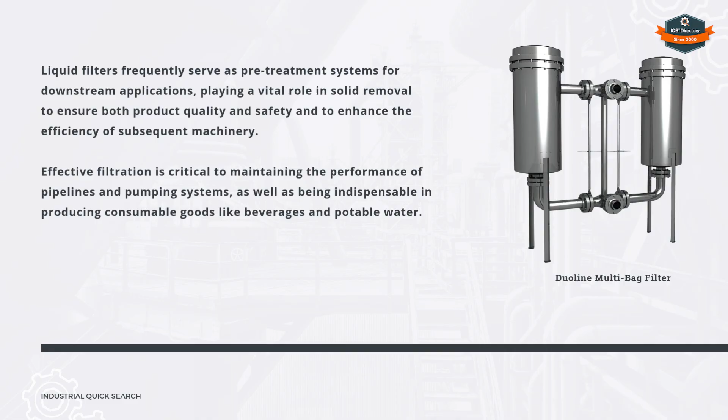Chapter 2. What are the operating principles of liquid filters?

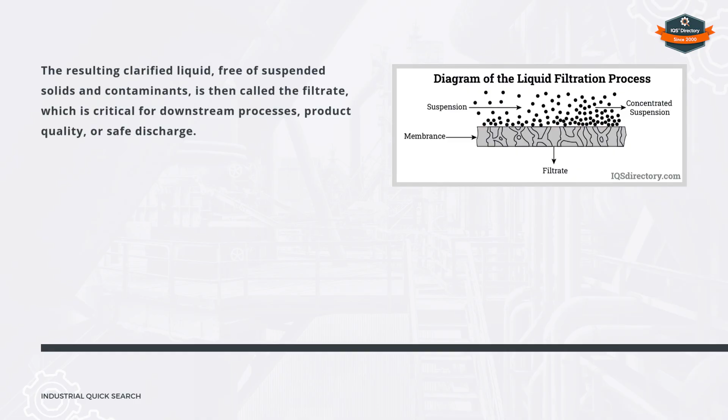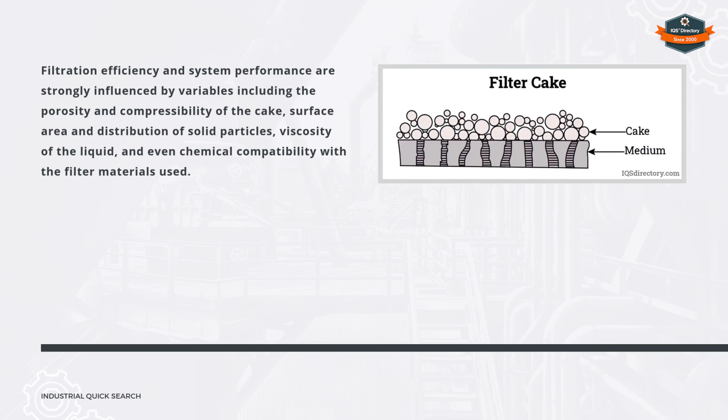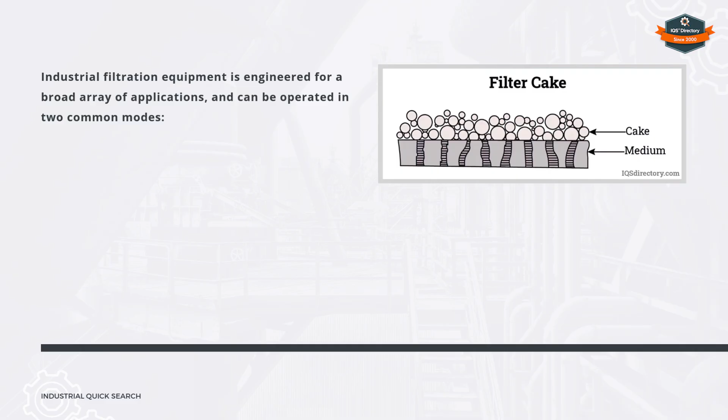Industrial filtration equipment is engineered for a broad array of applications and can be operated in two common modes: constant rate filtration and constant pressure filtration.

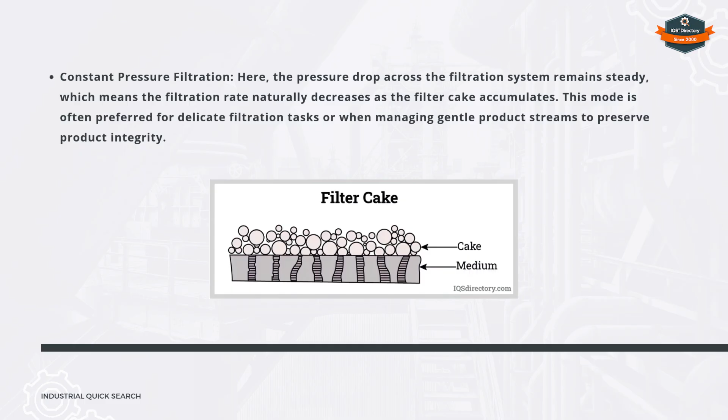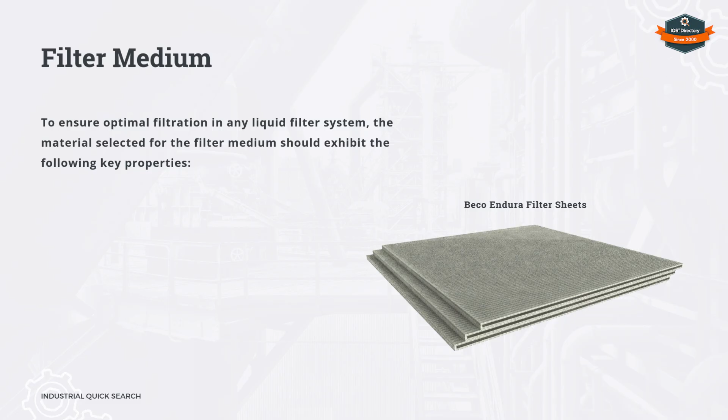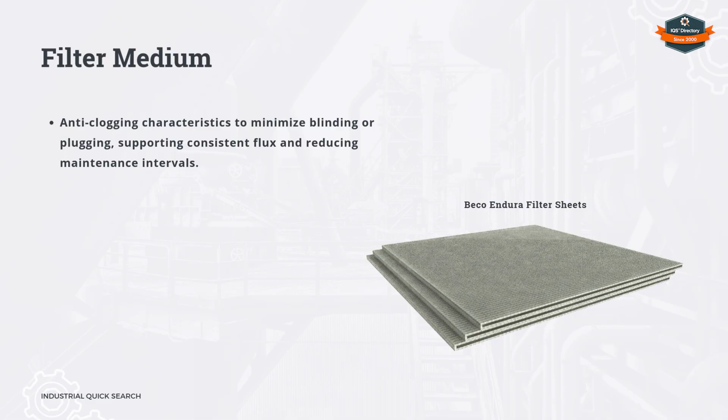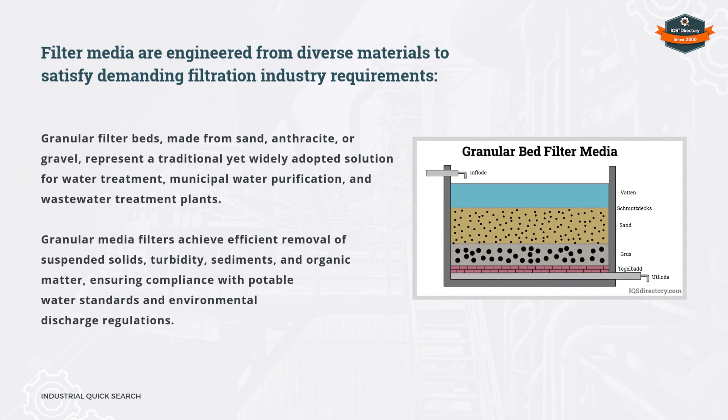Filter medium. Filter media are engineered from diverse materials to satisfy demanding filtration industry requirements. In selecting a filtration media solution, these performance attributes must be carefully evaluated for their impact on overall liquid filtration system operations and lifecycle costs.

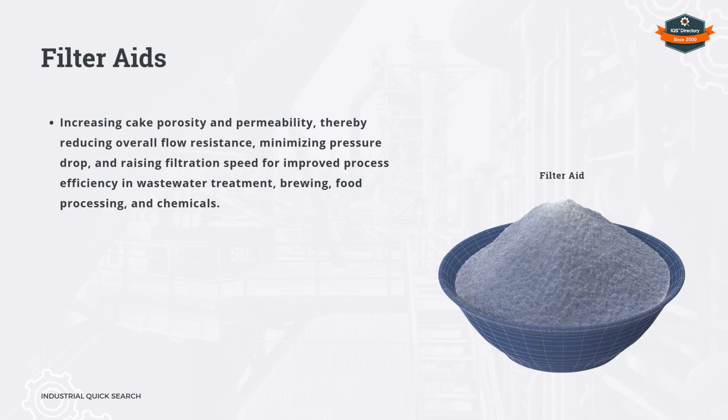Chapter 3. What are the methods of liquid filtration?

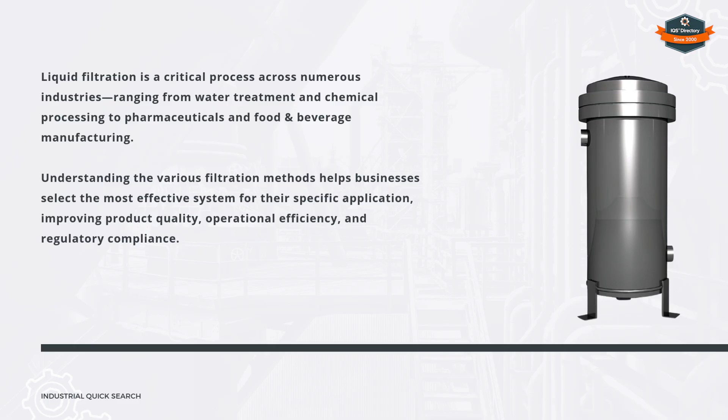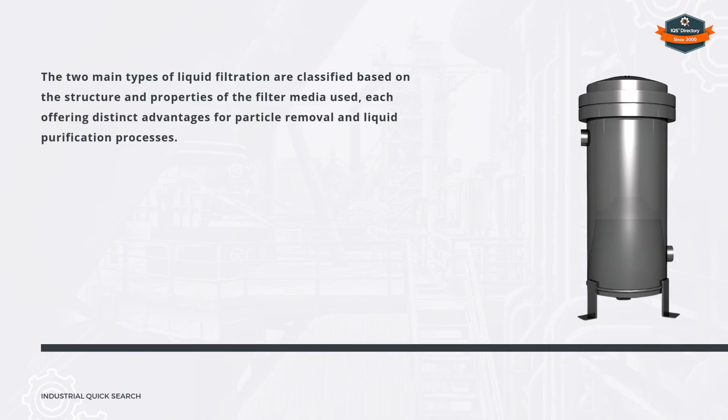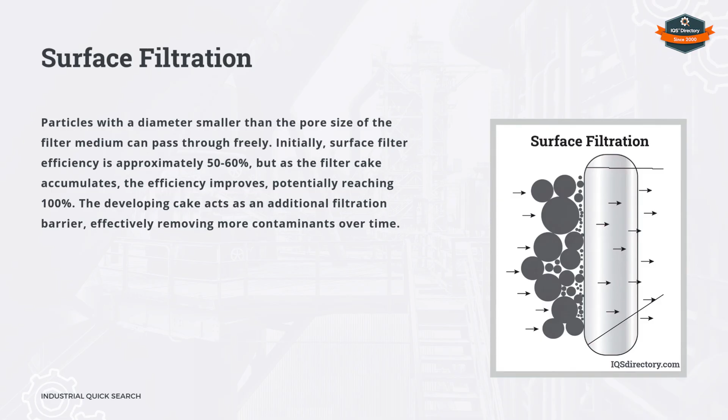Surface filtration. Depth filtration.

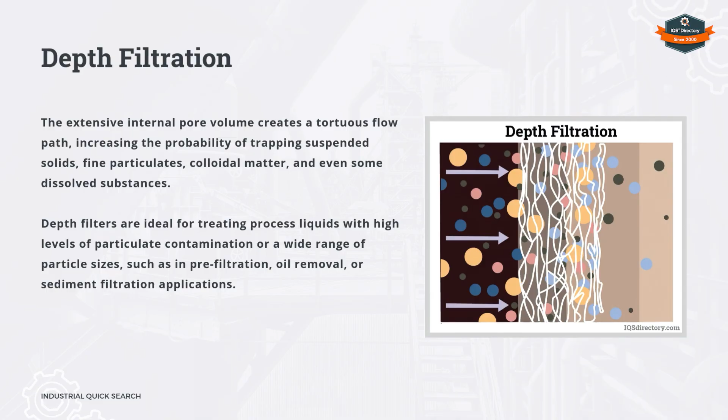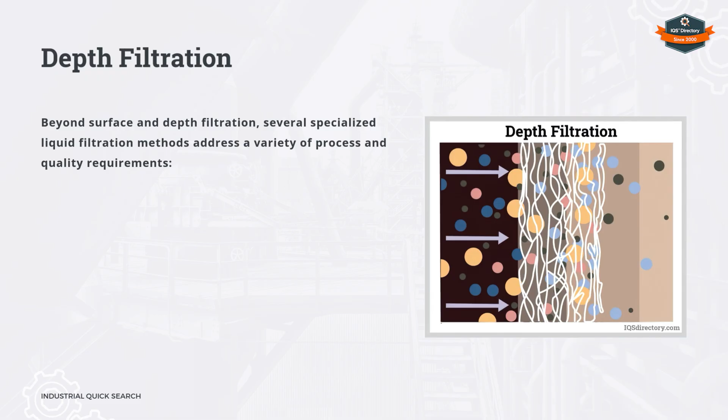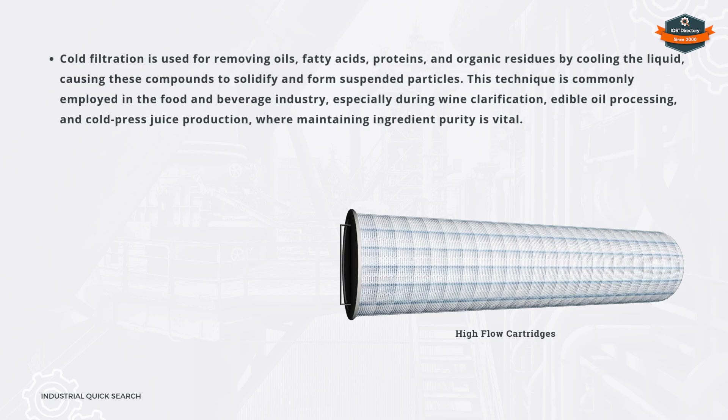Beyond surface and depth filtration, several specialized liquid filtration methods address a variety of process and quality requirements: hot filtration, cold filtration, and multi-layer filtration.

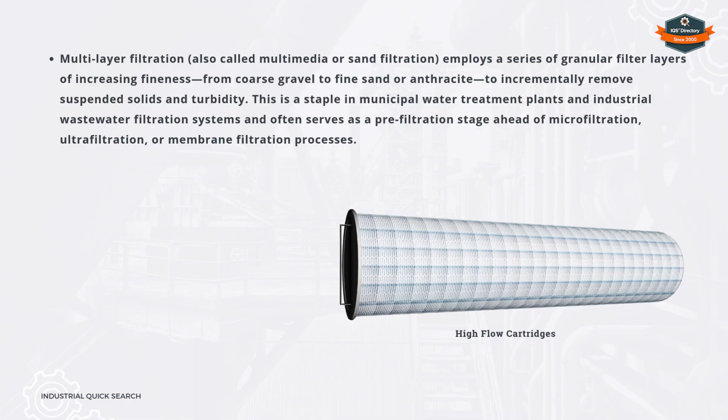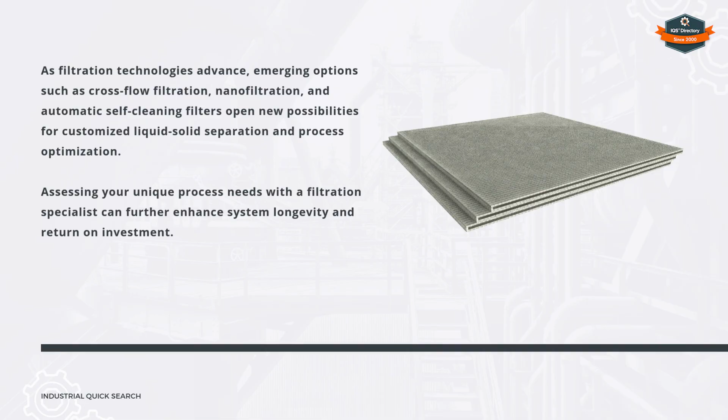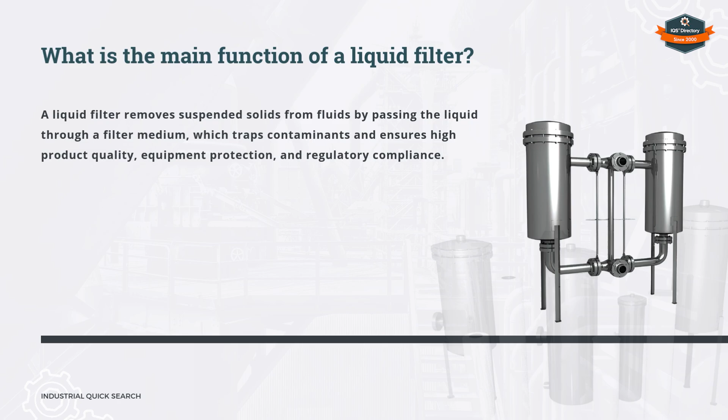Frequently asked questions. What is the main function of a liquid filter? How do surface and depth filtration differ? Why is selecting the right filter medium important?

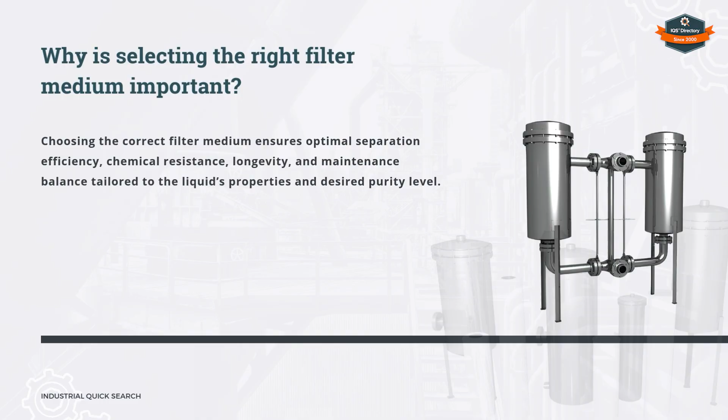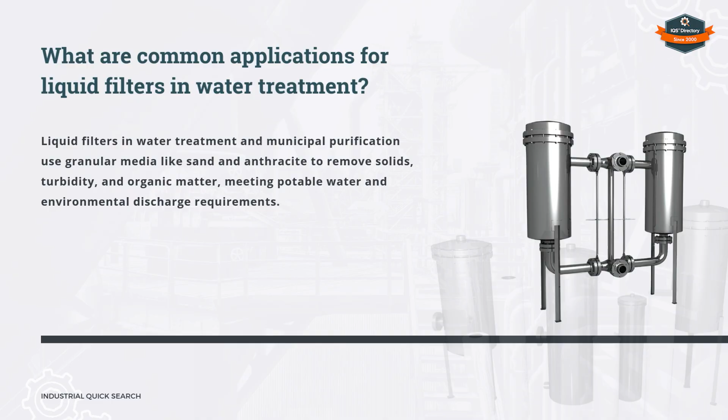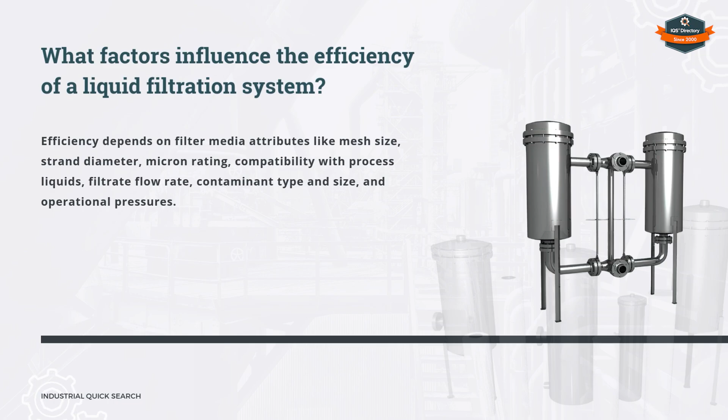What are common applications for liquid filters in water treatment? How do filter aids enhance liquid-solid separation? What factors influence the efficiency of a liquid filtration system?

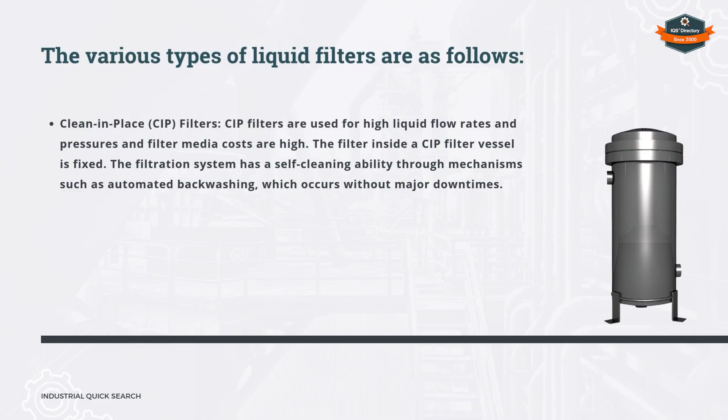Chapter 4. What are the types of liquid filters? Clean-in-place filters. Bag filters.

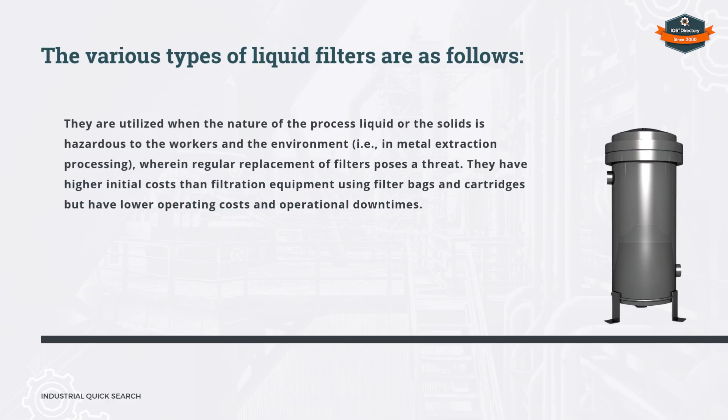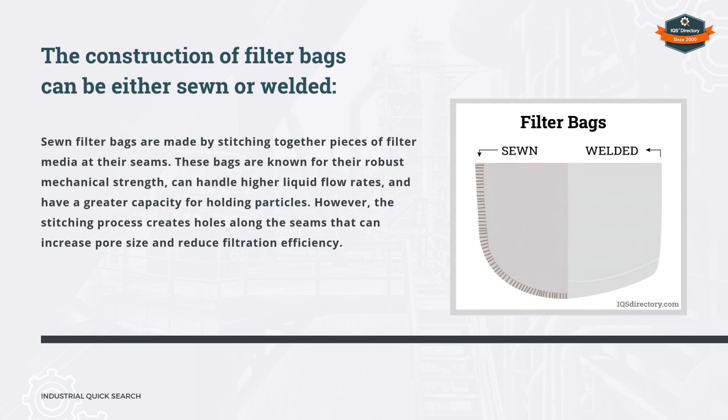The construction of filter bags can be either sewn or welded. Cartridge filter.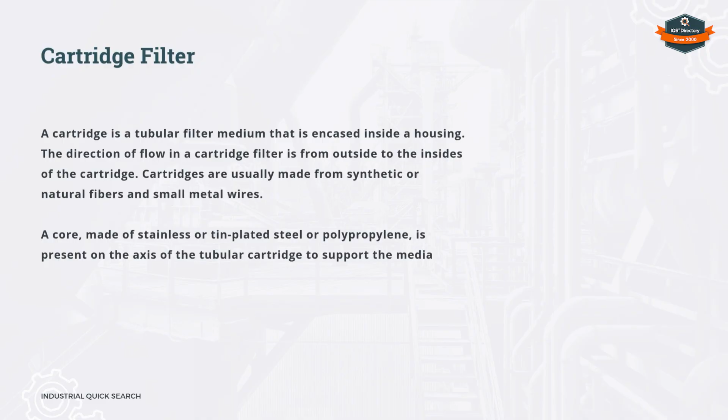Cartridge filters are available in various types based on their design.

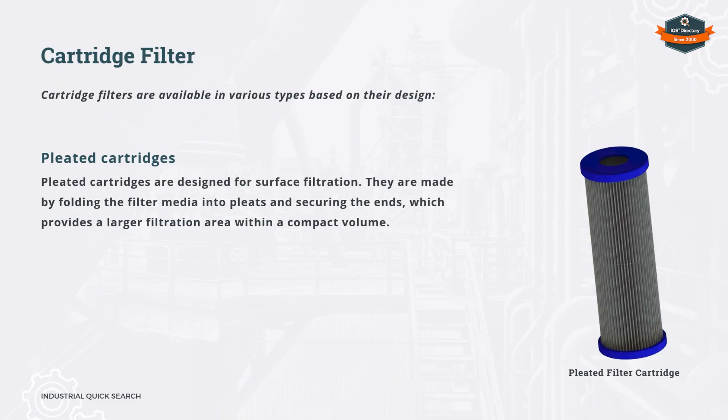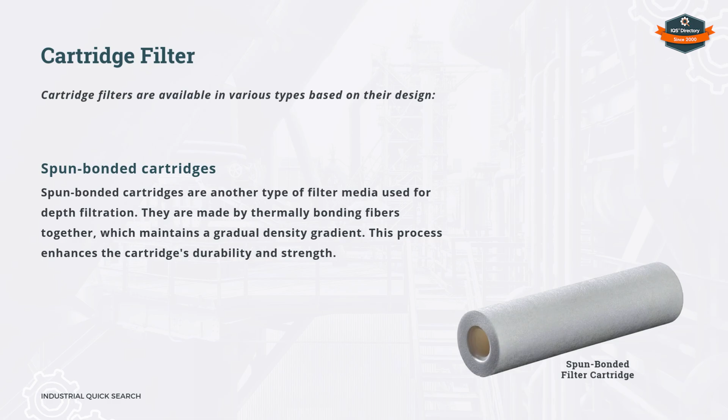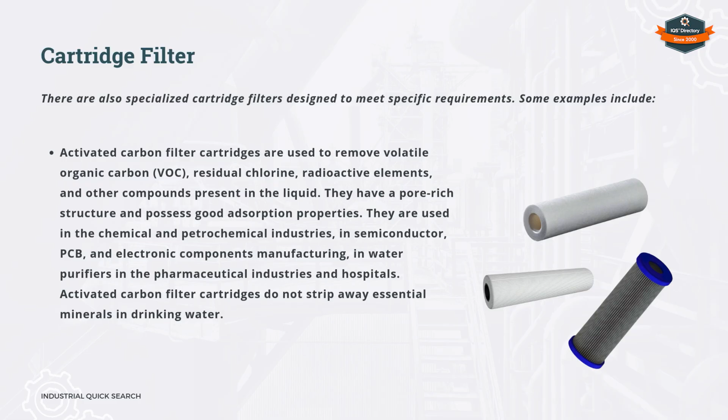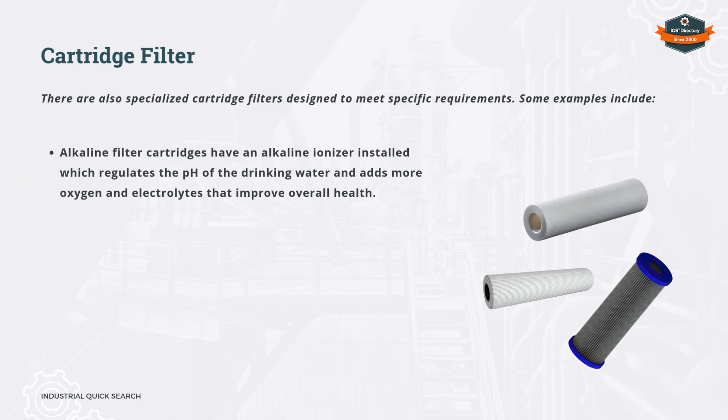There are also specialized cartridge filters designed to meet specific requirements. Some examples include activated carbon filter cartridges, ceramic filter cartridges, reverse osmosis membrane cartridges, alkaline filter cartridges, and ultraviolet filter cartridges.

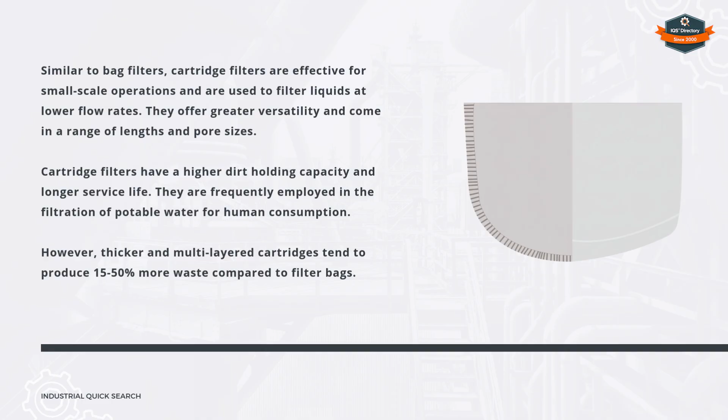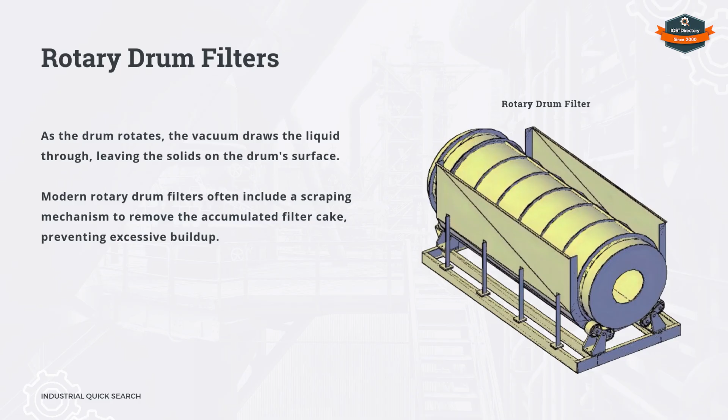Rotary drum filters, filter press.

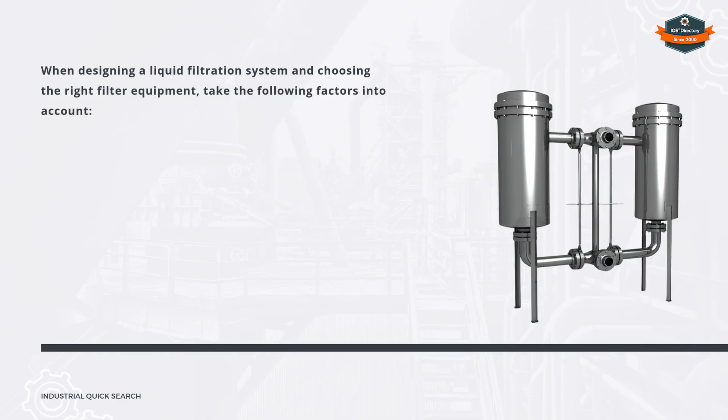Chapter 5. What are the considerations in selecting liquid filters? When designing a liquid filtration system and choosing the right filter equipment, take the following factors into account.

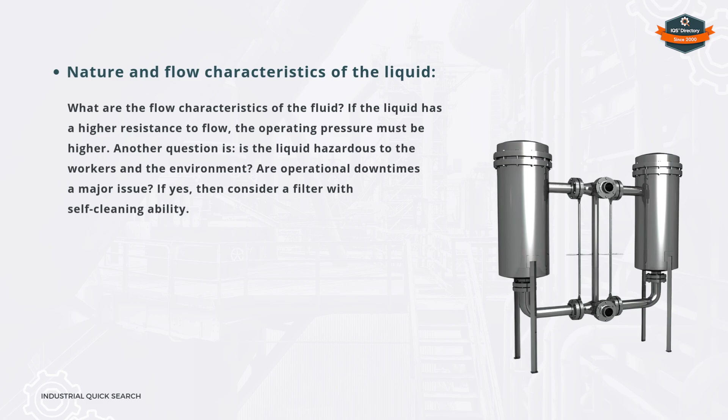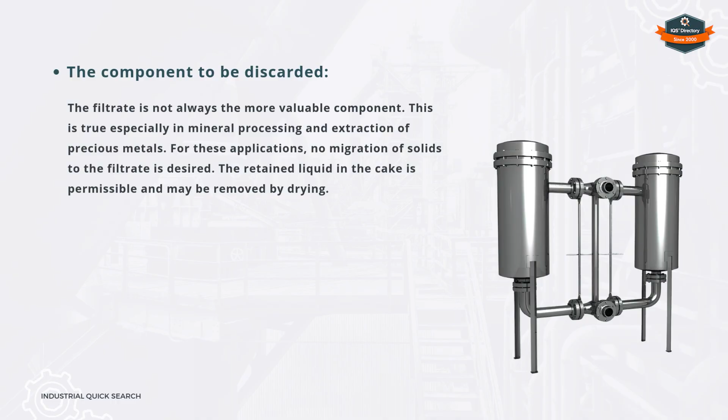The flow rate of the processed liquid, mode of operation, nature and flow characteristics of the liquid, nature of the solids to be removed, the component to be discarded, and criticality of filtration efficiency.